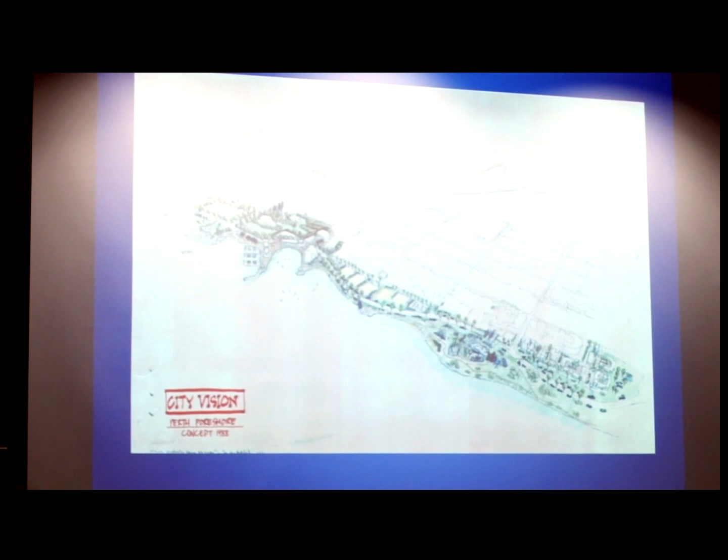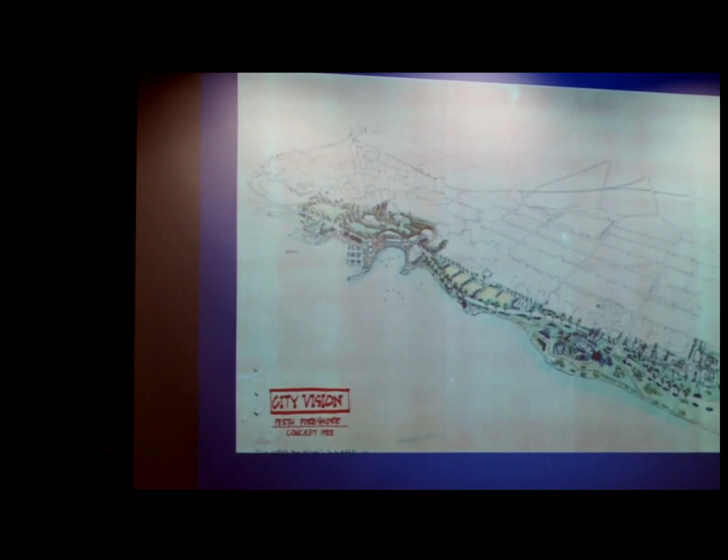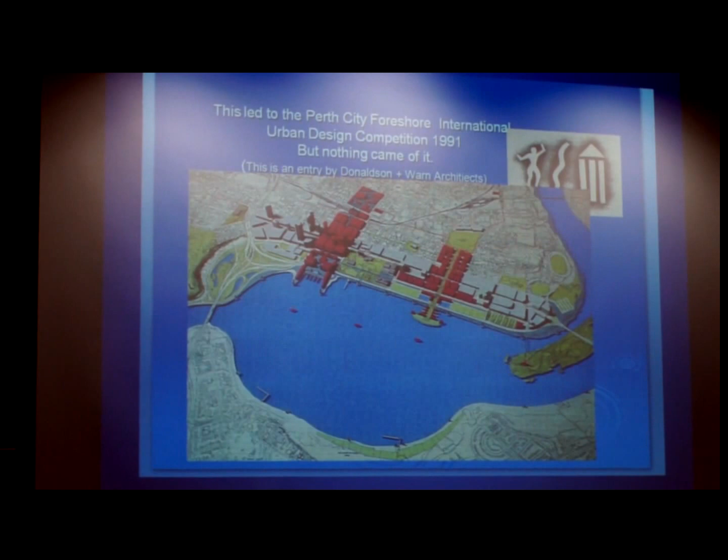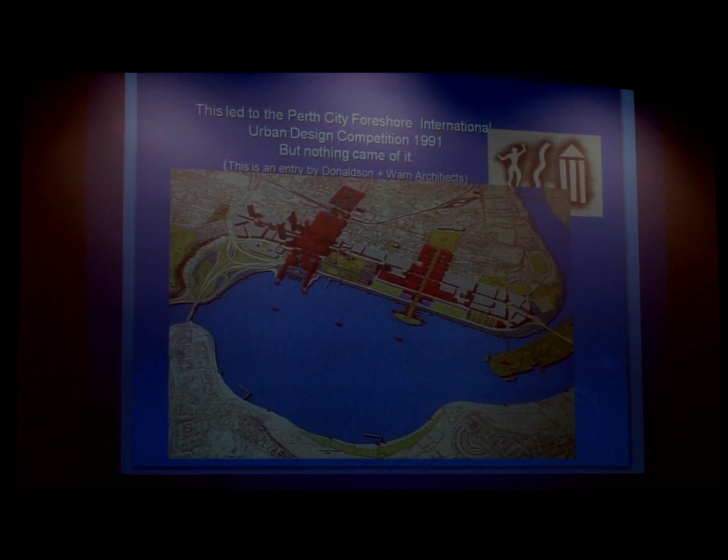the idea that the foreshore may have some development, not potential for commercial development, but for public use and civic uses of one sort or another. That was in 1988, that led in 1991 to an international competition run by the Perth City Council. You can see there, this is one of the entries, only one of many. The idea of building out into the water from the central city started to take effect way back over 20 years ago.

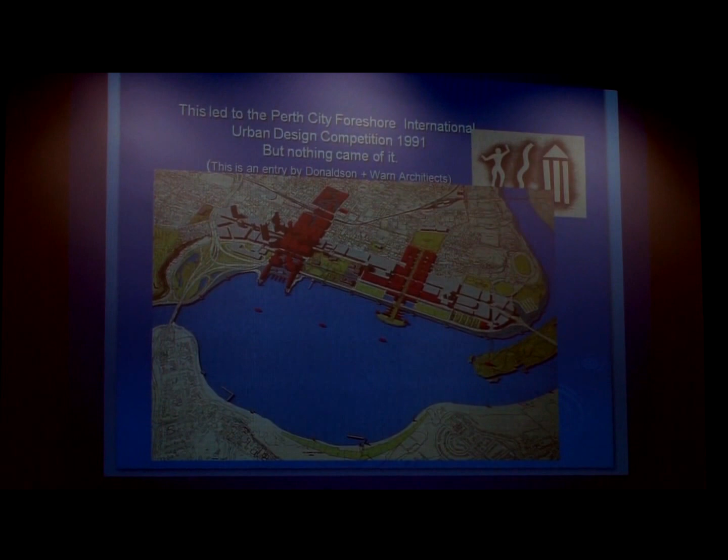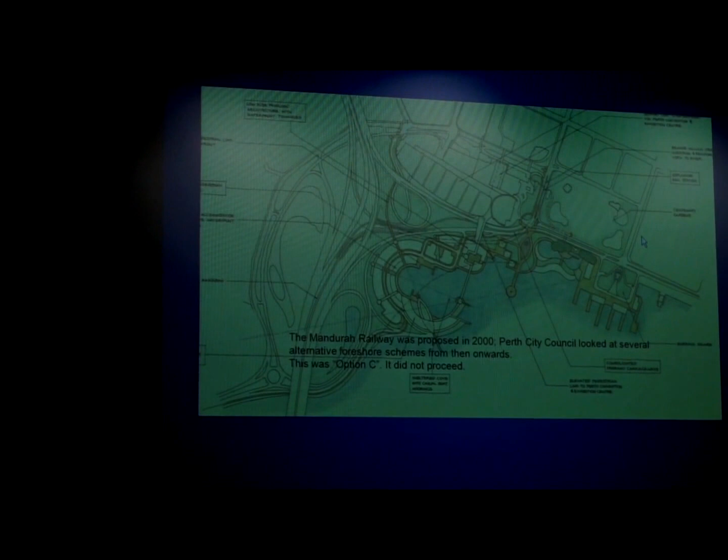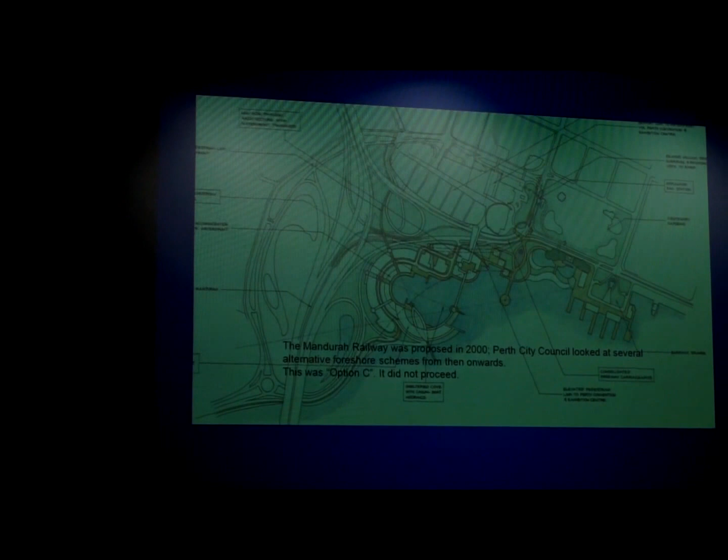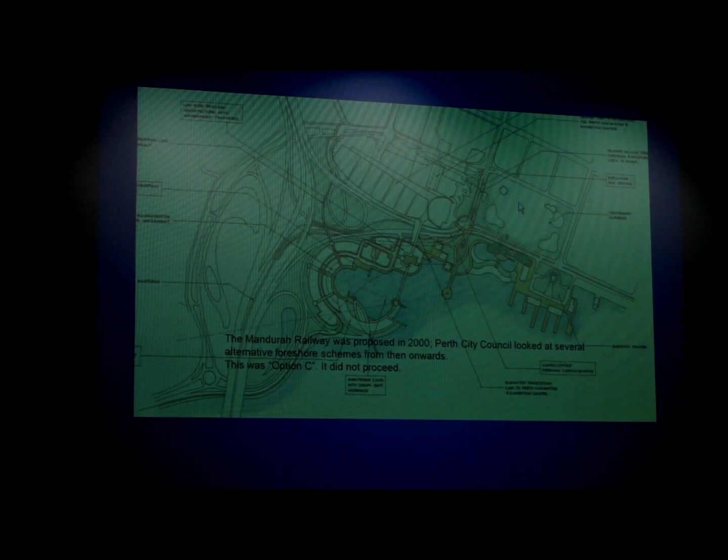We started to think, well, you've got to be careful what you wish for, because something's happened which you may not always care about. The City Council itself then went into looking at the different ideas. This was when the advent of the Mandurah Railway went through the city, and Perth City Council started to look at all sorts of different development ideas for the foreshore. Some of which, this was only one of several, of many, but you could see that they kept the Esplanade Park and the Riverside Drive intact.

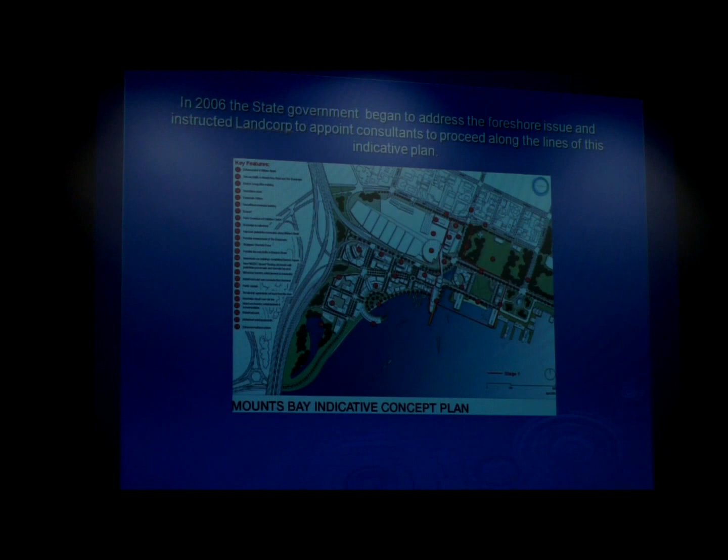That led later on to the state government taking an interest and beginning to address the issue. They then developed this sort of guideline plan, indicative concept plan under Landcorp, and they also kept the Esplanade more or less intact and started building out here as well, in front of the convention centre. That in turn led to, in 2007, what they called a peer review group. Various architects and planners were brought together to develop a sort of guideline scheme again, and that also kept the Esplanade, but started to build out along here and had no development out here.

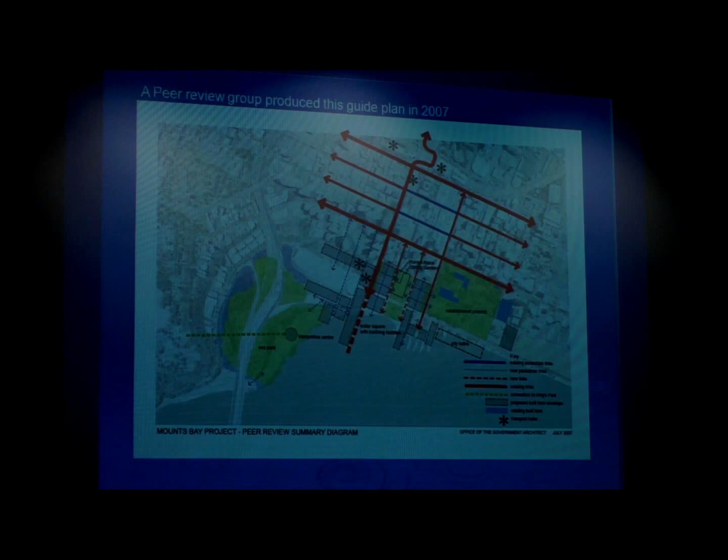And then the government engaged consultants who completely ignored all of that, came up with this plan, which you may remember a few years ago, the sort of Dubai on Swan. And there's the Swan. And they literally dug up the Esplanade.

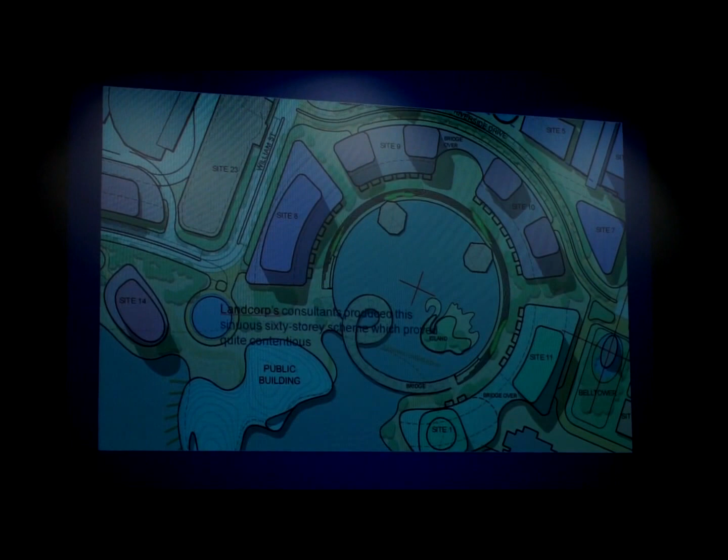Now, we at City Vision were all the time trying to develop some ideas and some sort of principles, and we thought that some of the principles that should be followed would be to do with respecting the Kings Park view and the landscape and the Mounts Bay and the Esplanade Park and the foreshore, and also recognising

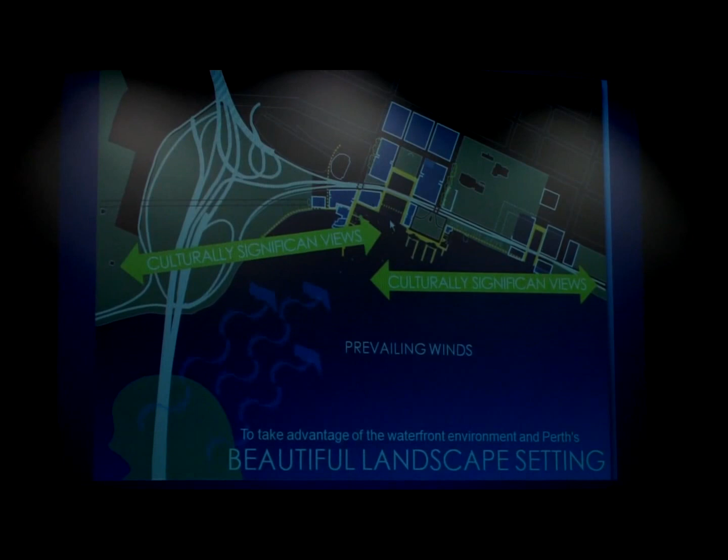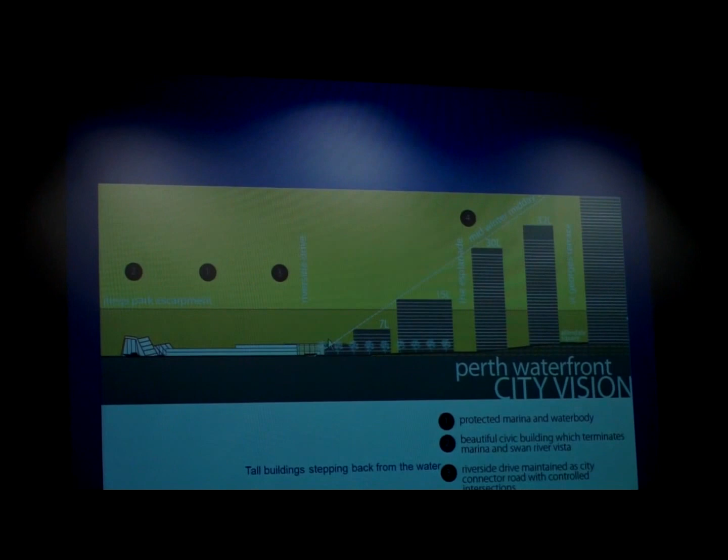And so you should be setting the buildings back under a line which represents the lowest winter sun, so they won't overshadow anything there.

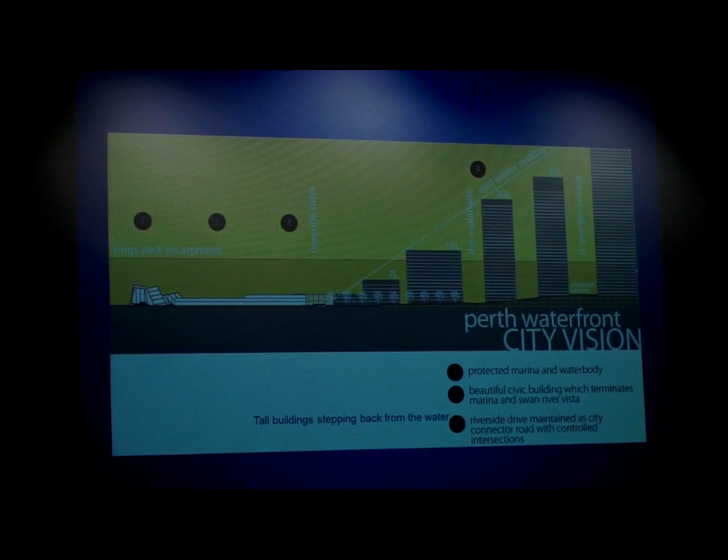And City Vision came up with a plan, which you may or may not like. That attracted the attention of the new government, and we were asked to come and talk to Mr. Barnett and Mr. Day about our ideas.

And we had continued with the idea of not closing Riverside Drive and of retaining a fair proportion of the Esplanade Park, not building over here. And if you're going to do this, do it with a little bit of care.

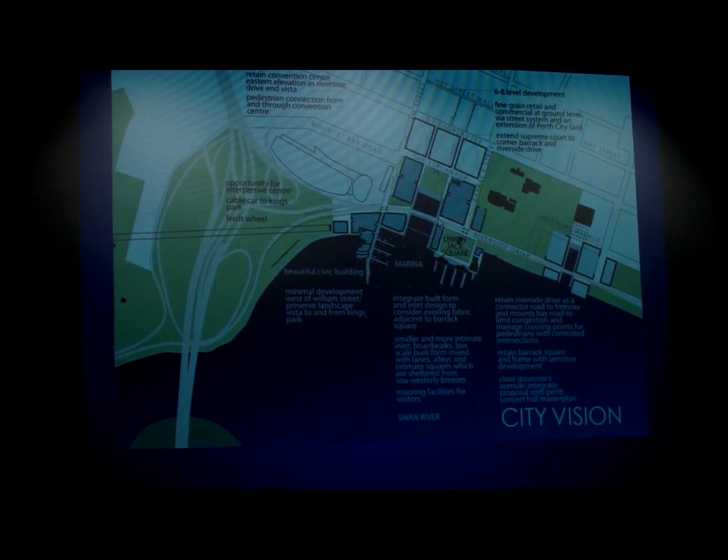But they came up again, using the same architects, with a new version of the plan we showed before, but instead of circular buildings, they're now square. And they now look like this. This was published in the paper not long ago, a couple of weeks ago.

And it shows you those tall buildings they're building without any shadows. They're sort of ghostly buildings, and this looks like Miami on Swan now. We've moved from Dubai to Miami. Yeah, so we've got some really... that's the site over here.

Now the big issue I've been asked to talk about tonight particularly is the question of access, traffic and access. Now that's the Northbridge Link, that's the East Perth extension, gateway thing, and this is here, the scheme we're looking at now on the waterfront.

There's 645,000 square metres of new office space going into those big buildings, and so many thousand people will come in, and the traffic and public transport system will be under enormous stress with all those new developments there.

Now, the government does have schemes for improving public transport, but at the same time they're going to be cutting Riverside Drive, and the public transport will be under enormous stress. So that's an issue.

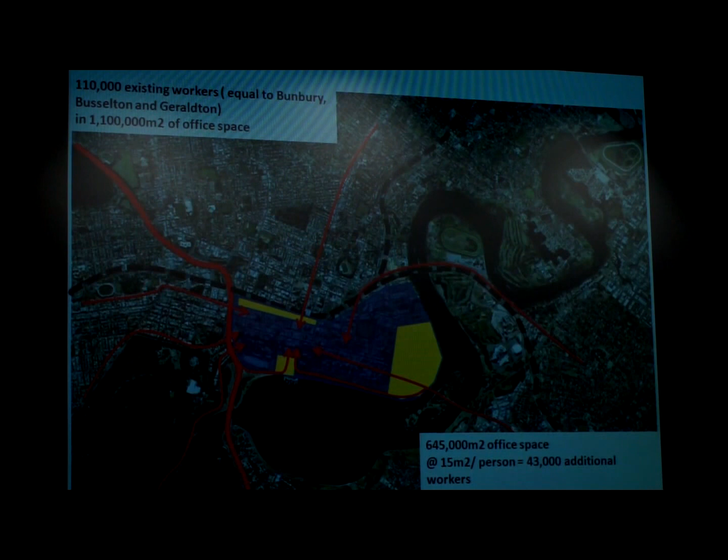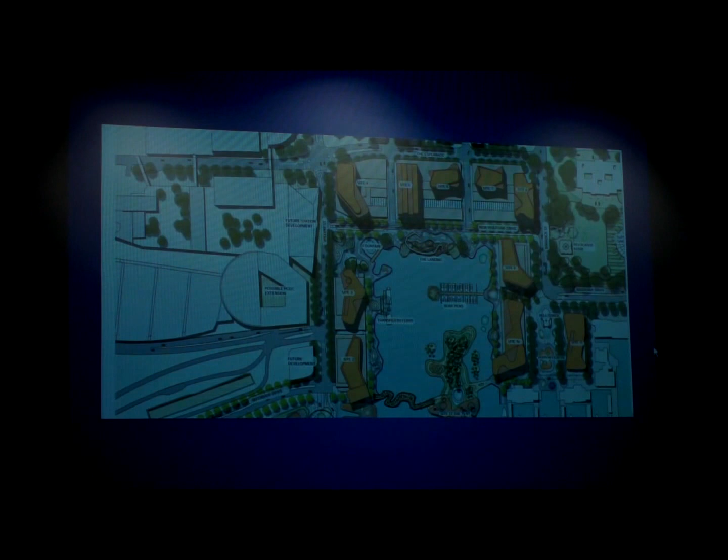Now we can see here these tall buildings, these are schematic buildings that the government architects and planners have put up. They're big decks of car parking under here. And these big buildings here, they cut the road across there, and you'll have to drive around that way to get around. Those yellow blocks are development blocks, and there's the new inlet.

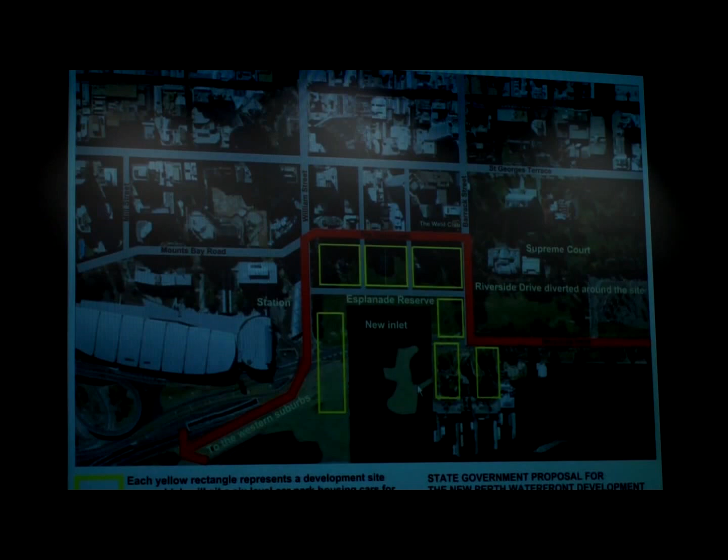Now, in terms of traffic and movement, the whole of the city must be seen in a way as an organic thing, like an organism. It moves, and people have to move across it, whether by public or private transport.

This is a key link across from east to west, and also from north across to northwest to southeast, with people coming in this way and going that way, right across. And Riverside Drive itself has no real alternative.

What will happen if it's cut will be the forcing, if you like, of traffic both into the CBD and around its periphery. So instead of improving traffic flow, we'll have more and more land use, more and more development on the waterfront site there, attracting more people to that location.

And we're actually slowing down and diminishing your access. Just as an idea, this is just looking at, say, morning peak movements from east to west.

Riverside Drive allows people to come down off the freeway and up into this part of East Perth, the east end of the CBD, or along this way and up into West Perth and what have you. And if you cut it, you're going to have them wending their way through Vic Park and into the new tunnel, which is going to be widened, but you've still got to get out of the exits, which are clogged, and into West Perth and so on, or into the already narrowed streets of the central area.

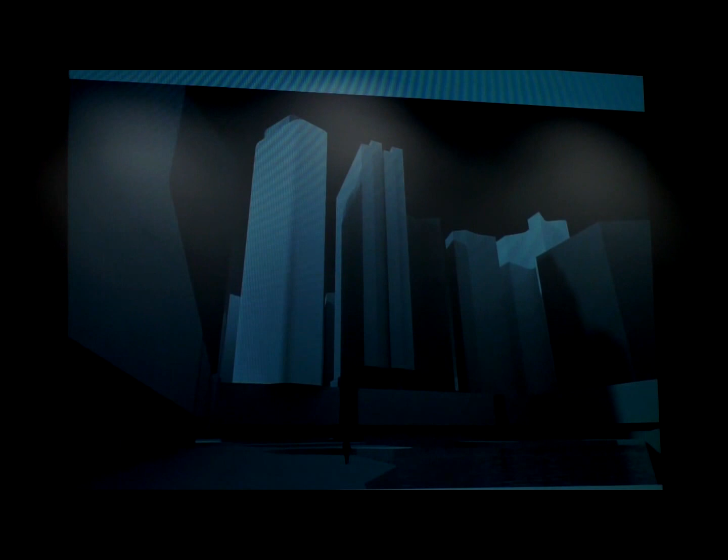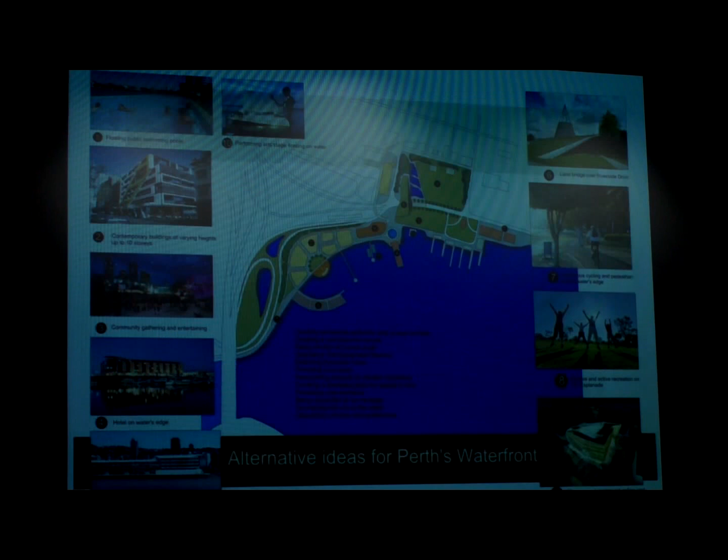Now this was done by some people working for the City Gatekeepers group, just showing what the volume of those buildings would be. We don't need big buildings in order to get an attractive waterfront, an exciting place to sit and have coffee and what have you. These are an alternative plan produced by the City Gatekeepers, and I advise you, if you're interested in this issue, to look at the City Gatekeepers site.

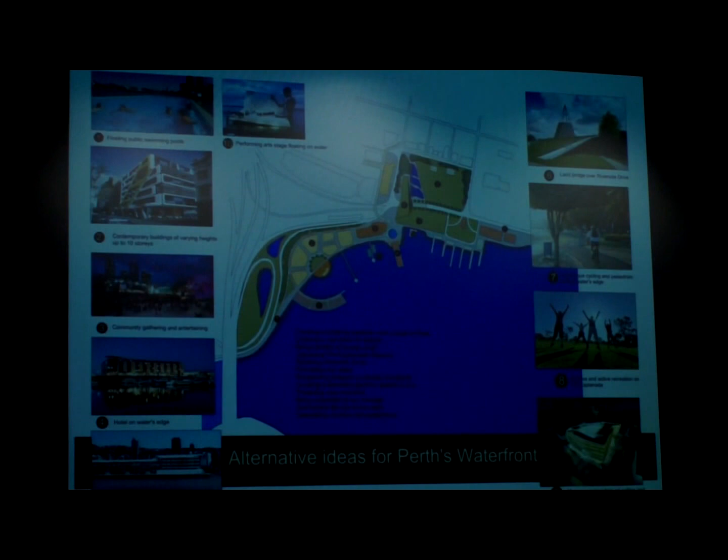It's called citygatekeepers.com.au. They've got a whole lot of issues like this.

This is a new plan produced by City Vision. It shows you a much softer development, still keeping a fair whack of the Esplanade, some of the heritage buildings, much lower and less dense buildings, and many more public buildings.

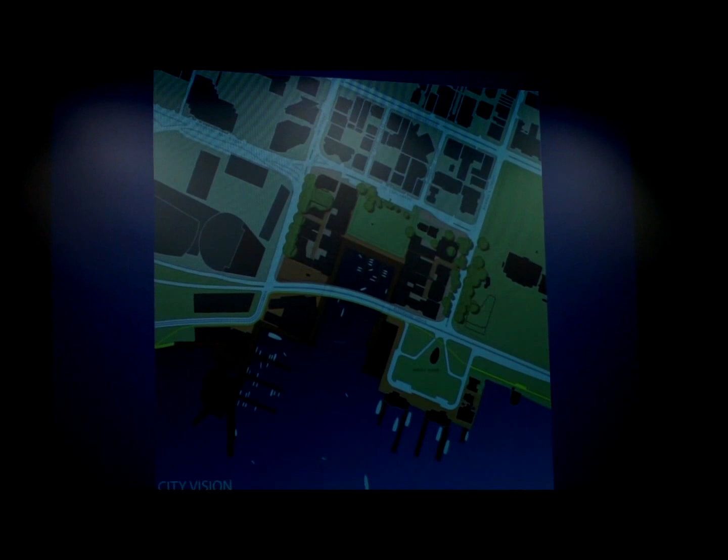You know, we're giving up a lot of public land here. Why don't we have civic developments? And whatever these may represent—a new museum, a new lyric theatre, all sorts of uses of that sort—which in a way have a call on public space that private and commercial development doesn't have.

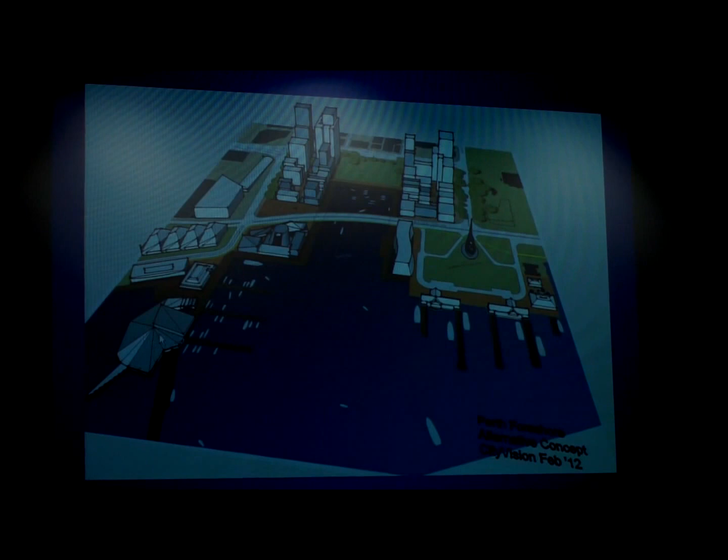There we are, I've come to the end. Good timing. And here's just a view, a three-dimensional view showing perhaps a hotel, with some buildings stepped back, and public use here maybe of one sort or another. But that's my talk.